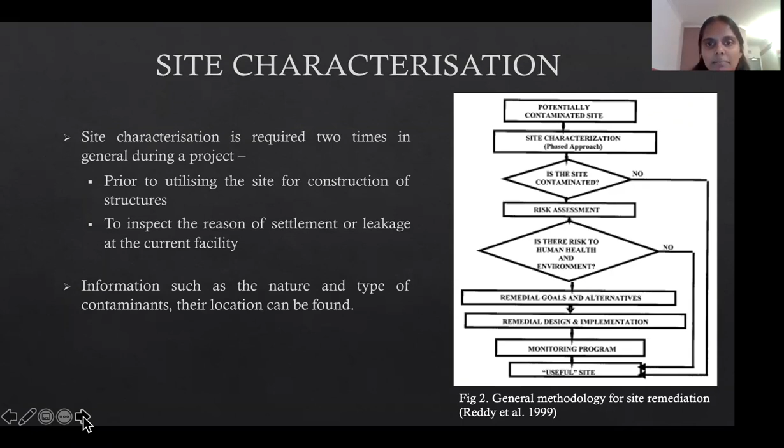Site history. Fitzroy Gasworks was a crucial gas manufacturer from coal to the area under Melbourne around 1861, where the production stopped in 1927. The site operated as a facility to store gas until the 1960s. Furthermore, the manufacturing of military hardware and supply of ammonia byproduct for explosives was carried out on the site by the Defense Department during the 1940s.

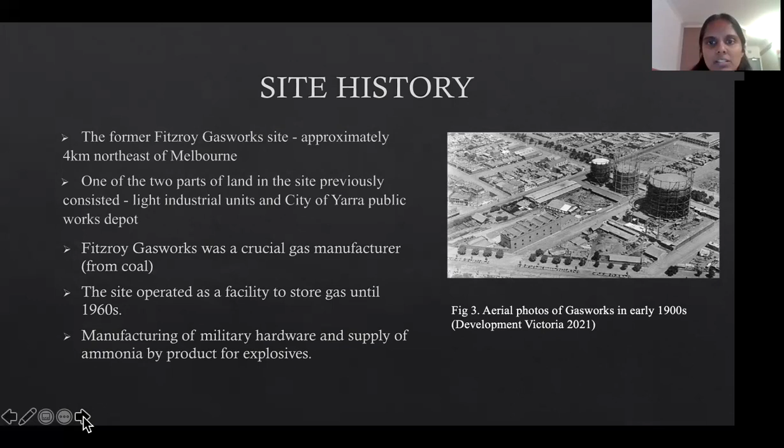Site investigation. In the first phase, phase 1A of the site remediation, the data from investigations conducted previously was analyzed and a draft remediation action plan was drawn to develop a data gap analysis report. Planning documents were drafted and an independent EPA auditor approved the remediation. In the next stage, phase 1B, the following tasks were carried out.

Field visit and site investigation were conducted by heritage consultants, EPA auditor, and other project members. Sample boreholes were drilled using a mobile drilling rig near the three gas holders and in the premises of the buildings present now. Geology was inspected in detail visually and analyzed after excavating test pits. Soil above important facilities was further tested with the aid of hand augering holes.

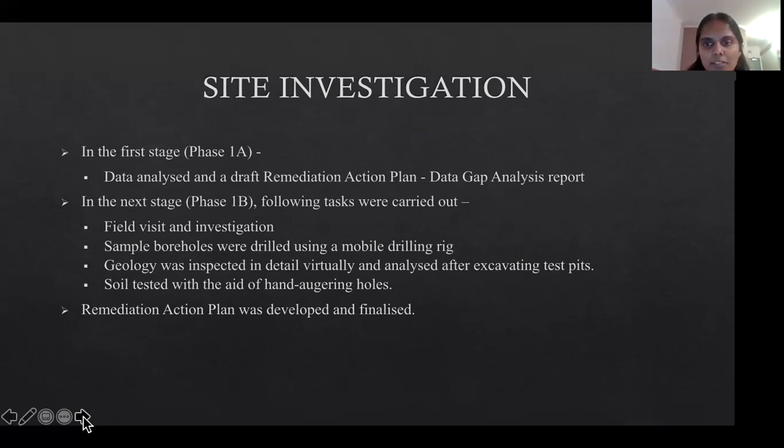After studying the results obtained in phase 1B investigation, the remediation action plan was developed and finalized. The plans and necessary documents made by Enviro Pacific were approved by the respective authorities. To assess the risks involved in the site remediation, a risk assessment matrix was developed in assessing the potentiality of exposure. By looking at the scale of likelihood, it can be said that more emphasis was given to the contaminant threat in the area and to the ecosystem.

The major contaminants that were found were light NAPL such as benzene, toluene, and other BTEX compounds, dense NAPL such as coal tar and naphthalene, and other contaminants such as cyanide and ammonia. Other assessments in the matrix involve the threat to the locality, which isn't major unless the locals undergo direct exposure to the site, which may cause irritation and inhaling problems. The worker safety was managed well too, with odor control enclosure kits provided to them on site for the work.

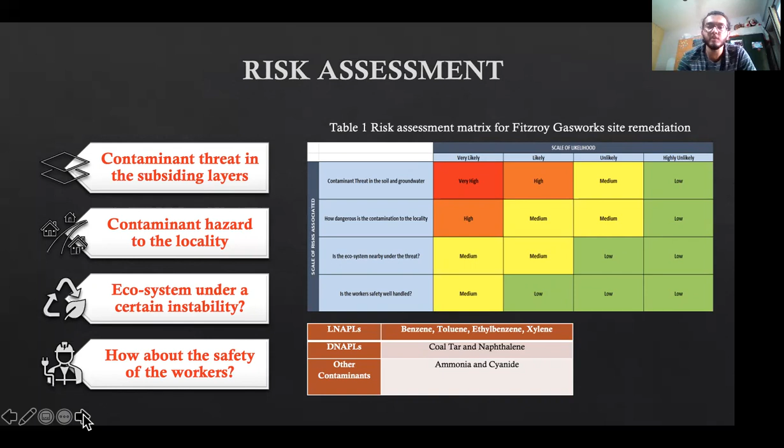So this is like a literature review for the identification of the most suitable remediation technology for our site. So initially we researched a few in situ and ex situ remedial technologies for the remediation of the vadose zone. This includes soil vapor extraction, soil flushing, and bioventing. The selection of these technologies is based on the target contaminant, the remediation time, and associated cost. We mostly focus on in situ technologies as they save extra work for transportation, handling of waste, as well as smooth operation.

So the first technology we identified was soil vapor extraction, which is mainly suitable for volatile organic compounds such as BTEX and is relatively faster and cost efficient. Then the next technique is soil flushing, which is suitable for volatile organic compounds, semi-volatile organic compounds, fuels, and pesticides.

Another technology identified was bioventing, which involves injection of air and nutrients into the unsaturated zone to enhance in situ biodegradation of the contaminants. Studies have found that this technique is efficient in removing dense NAPLs as well as light NAPLs. However, this technique is still at development stage and requires more research.

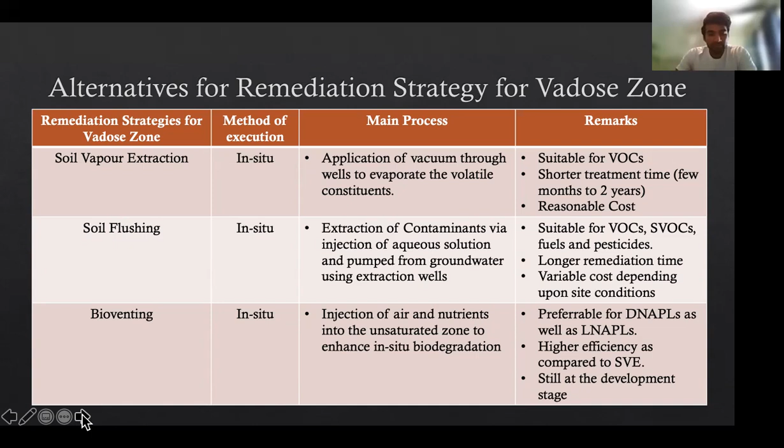Next, we researched various remediation strategies for groundwater. According to our site characteristics and contaminants, we found that air sparging and groundwater pump and treat technology could prove to be feasible options. Air sparging follows a similar process to SVE; the difference is that air sparging deals with contaminants in groundwater. Another technology is pump and treat, which is similar to soil flushing.

In summary, after studying these technologies separately, it was found that a combination of two technologies could be a feasible option, as our site is contaminated with LNAPLs as well as DNAPLs such as coal tar and naphthalene. The other contaminants, including ammonia and cyanide, were found to be below detection limit, so no remedial strategy is proposed for them. Therefore, two remediation strategies were suggested: the first option is a combination of SVE and air sparging, and the second is soil flushing and pump and treat technology. The combination was based on similarities in operating process and the types of contaminants they remove.

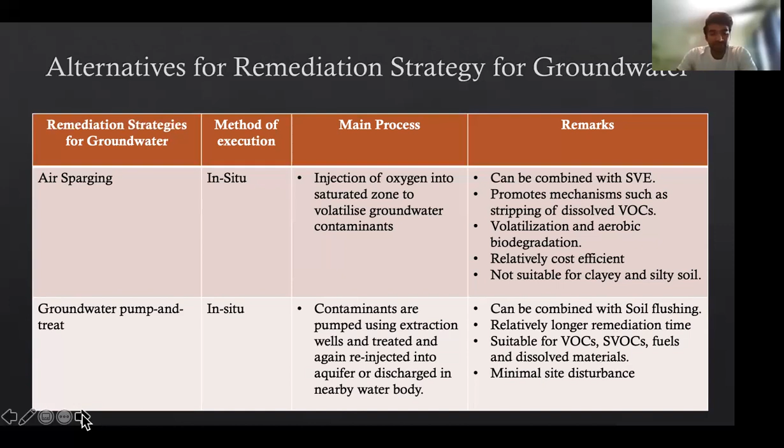So the combination of SVE and air sparging is identified as one of the potential remediation strategies. SVE technology is used to remove volatile compounds using airflow. Soil vapor extraction uses airflow due to a pressure gradient in the unsaturated zone. The volatile compounds are evaporated and withdrawn using extraction wells. SVE is used to treat large volumes of soil in a relatively short period of time and at a reasonable cost.

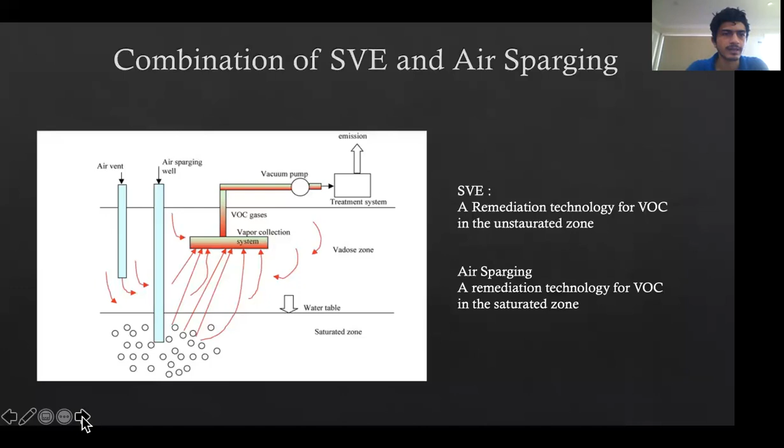On the other hand, air sparging is done by injecting pressurized air directly into the groundwater, which causes air bubbles to form and rise along with the contaminants. Air sparging can be used in combination with SVE by first moving the contaminants from the saturated zone into the vadose zone and then extracting the gases using pumps.

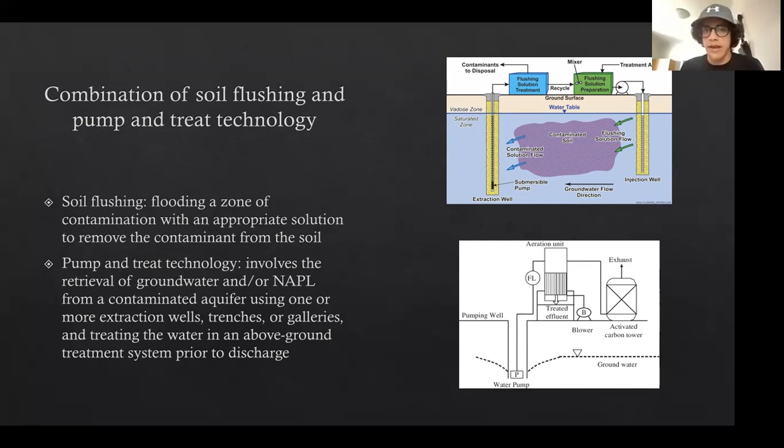The second combination that was looked at is soil flushing and pump and treat technology. Soil flushing is basically flooding a zone of contamination with an appropriate solution to move the contaminants to the place where pump and treat technology can take over. Pump and treat involves setting up various extraction wells where the contaminated groundwater can be pumped to the surface to apply surface treatment methods.

To propose a remediation strategy, the following factors were considered. The first factor is the vadose zone contaminants, which include LNAPLs such as BTEX compounds. The saturated zone contaminants include BTEX as well as DNAPLs, including naphthalene and coal tar. The geological and hydrological data of the site were also investigated.

The geological data revealed that the site has fine to medium grained soil particles with a hydraulic conductivity ranging from 0.0004 meters per day to 0.44 meters per day. The hydrological data revealed that the groundwater table was approximately 6 meters below the ground surface, and the direction of the groundwater was towards the Yarra River.

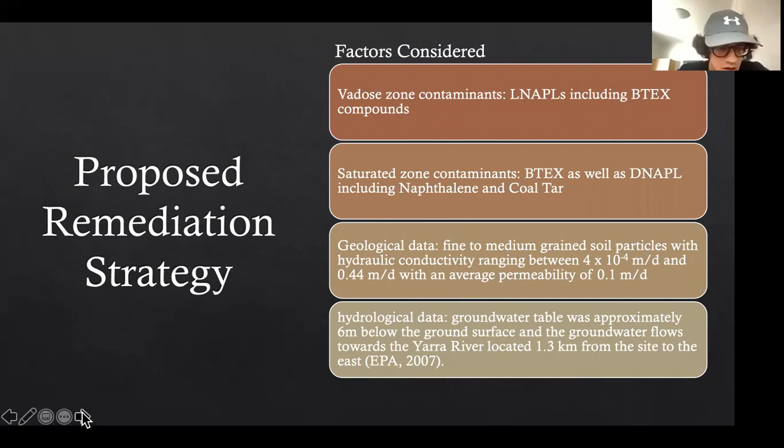So to conclude, soil flushing in combination with pump and treat technology was suggested as the recommended strategy. This is the course of action to execute this strategy. First, flooding the vadose zone with a mixture of water, sodium hydroxide, VeruSOL surfactant, and an oxidizing agent. Then the contaminated water as well as the volatile contaminants will be pumped to an on-site bioreactor for surface treatment.

The bioreactor will facilitate the breakdown of contaminants using anaerobic biodegradation. Once that's done, the water is treated to meet the discharge standards, and it will be reused or discharged into the Yarra River. The sludge produced from the anaerobic digestion can be sent to landfills.

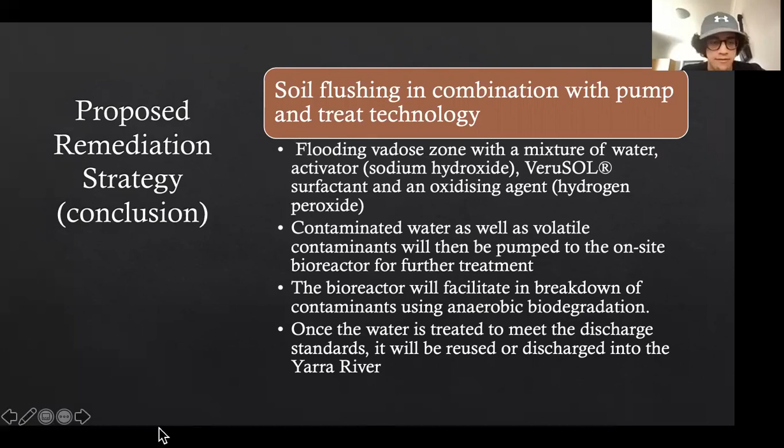The justification for this strategy: first, the combination of soil vapor extraction and air sparging could also prove to be effective. However, this combination would only target BTEX compounds and not DNAPLs such as coal tar. The geological site investigation data revealed that the site consists of fine to medium textured soil. Therefore, the high porosity of clay and fine grained soil would act as a barrier for effective vapor extraction.

And lastly, the cost of the two combinations was also a deciding factor, and a detailed cost analysis has been looked at in the report.